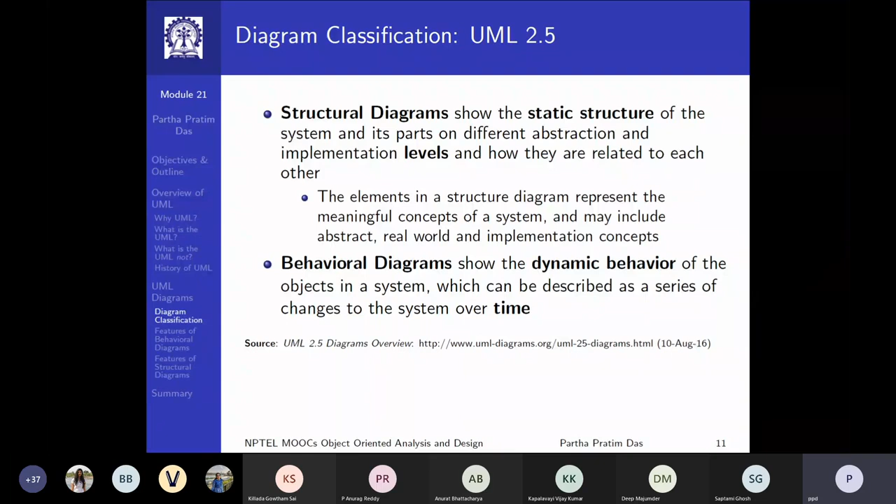And obviously we show the interrelationships. Now, getting deeper, if we look at the right-hand side, the behavioral diagram, then the first and foremost important is the use case diagram, which represents the requirements of a system, including internal and external influences. So this diagram is used to capture the user specification for a system to be built.

Very simple concept of use case is how would you want to use a particular system, right? It's like making a wish, dreaming about the system. If you take the whole system as a black box, then who are the people who will interact with this system? What are the kind of inputs they are expected to give? What are the kind of outputs that are expected from the system? And even internally, if there are actors who need to manage the system in some way, what are the things that they will do?

So use case diagrams - as a term, use case is how you use, it's a case of how you use. So if you look at your booking system, one use case is very clear: that you will have to make a booking. Making booking is a clear use case, where you have an external actor who could be the person booking, because now you have online booking, so people book themselves.

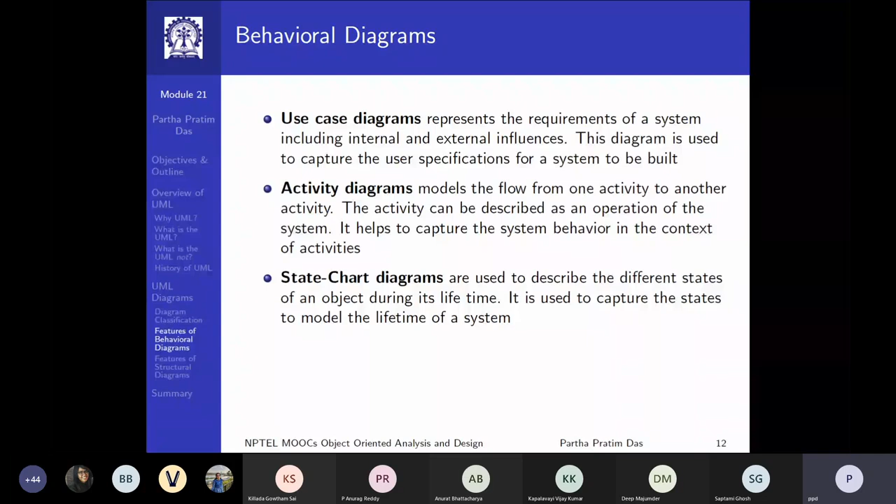We will talk a little more about this later. Some of the other diagrams, like behavioral diagrams, deal with interaction. Most important in that is the sequence diagram, which basically tries to set the ordering of different messages that go in the system.

One key way to look at UML models, or systems in general with strong object orientation, is to think in terms of a client-server model. Every object is one who can accept a message as a request for service. We know objects have states and objects have behavior - behavior is the interface. So when you call an interface, you can think of this as sending a message to that object, and based on that message, the object will react and give you a response.

These are the events that happen in a client-server system. You can think about the whole design as if a pool of objects are floating around in the system at any point of time, with different objects sending request messages to other objects, and they respond through messages again, and based on that you send out more messages. This messaging system in the client-server structure is what the sequence diagram tries to capture - what is the first message that has to happen, who will get that message, and what is the expected output based on that.

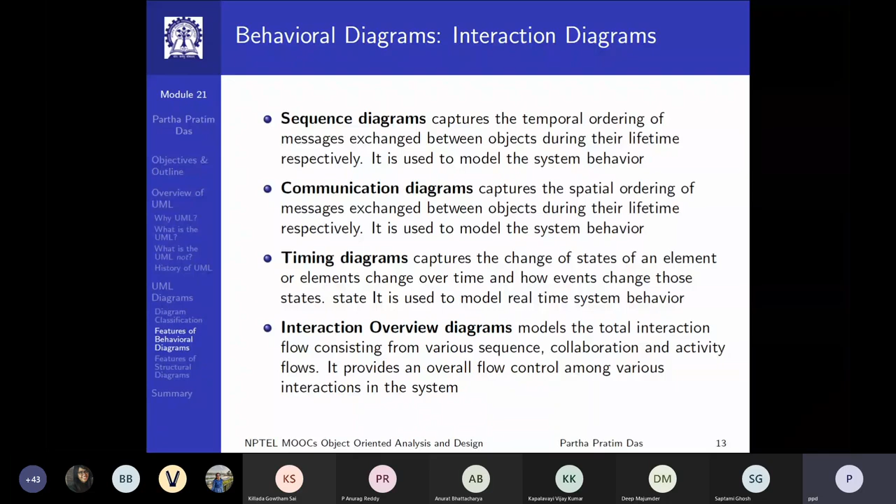So we have talked broadly about these 7 behavioral diagrams. If I go back to slide 10, we have covered use case, activity, state machine or state chart, and these interaction diagrams—broadly these 7—of which we will focus in more detail on use case, activity, state machine, sequence, and communication primarily.

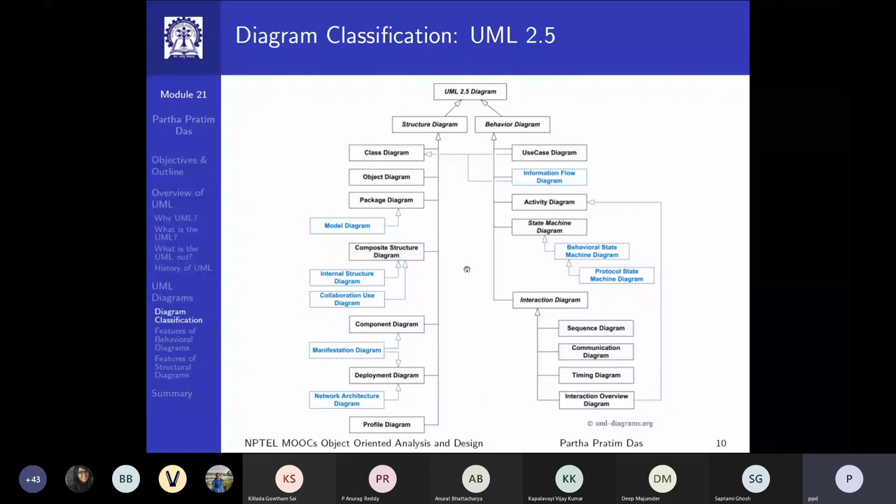Now let's shift our focus somewhat to the structural diagrams. I'm on slide number 14, module 21. The most important structural diagram, which you already know except for the UML syntax and semantics of expressing it, models the analysis and design of the static view of an application. What the class diagram tries to do is capture the key abstractions of the system at the first level.

When we take up assignment 3, we see that there are classes already identified—those are the key abstractions. For example, station is a key abstraction, railway is a key abstraction, booking class is a key abstraction, booking itself is a key abstraction, passenger is a key abstraction. These are the key concepts in the system, and at the first level you make a class diagram involving each of these concepts, represented by a class or by its specialization.

It's pretty much the way we write the code, but written in a language-independent manner. The second part to keep in mind is that it is later refined with details of every abstraction. So you say booking class is my key abstraction, and then it has to be refined in terms of having a variety of booking classes—there could be a first class, there could be AC3 tier, AC2 tier, and so on and so forth. So how will that refinement work in terms of the abstraction?

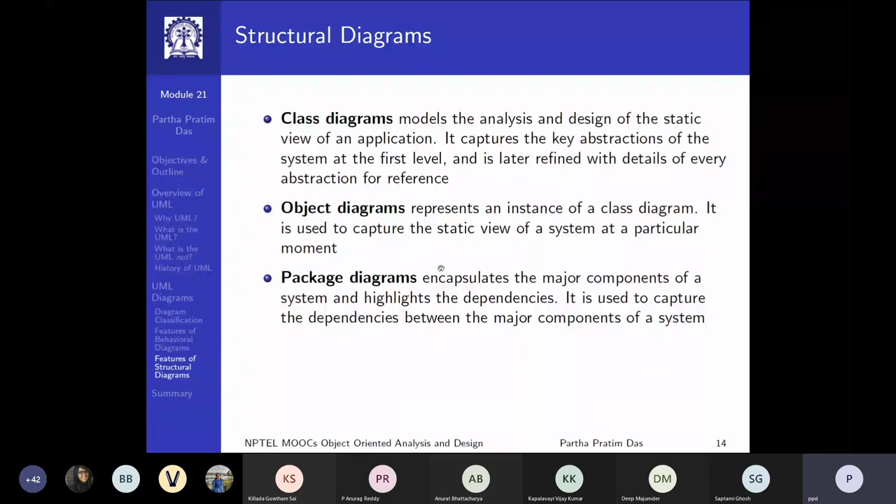So these are the structural diagram views that you have. Then you have a set of structural diagrams for composite structure, part, subpart, and interfaces. You have component diagrams, which is relevant if you have the physical system, and how to implement it in terms of the physical system, so that it can go down to the level of servers, active components, IoTs. Many of the systems today have a variety of IoT, Internet of Things. You can have IIoT, Industrial Internet of Things, you can have MIoT, Mobile Internet of Things, and so on.

So these are physical components, the physical aspects of the system where you need to put your different packages. You can have a component diagram, which is more important for the implementation side.

You have the deployment diagram, which describes the hardware components and software components and how they are deployed. How many physical servers you will have, which software component will run on which server. A particular server may run multiple software components. One particular software component may be huge enough, or may require a turnaround which is very steep, so that it might run on multiple servers in parallel, and so on. So it is used to capture the hardware topology and architecture of the system.

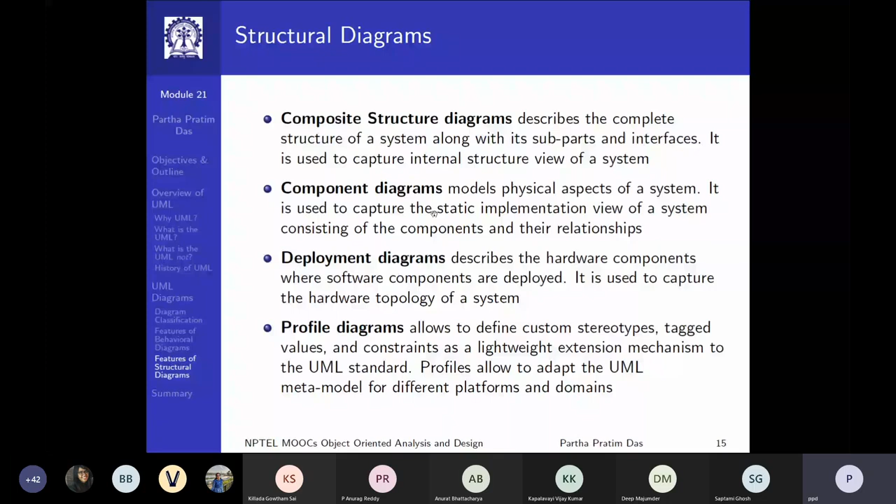Then you have the profile diagram, which is defined to specify custom stereotypes, tagged values, and constraints. These are certain ways to really describe a meta model of your platform, and so on. As you can see, this later part of structural diagrams is going more towards the implementation side. We will not get into the details of that because we will not have that much time, but it's good to know what exists where.

Okay, so having said that, let me move on to the next module, SDLC. What I want to talk about now is, on one side we have the SDLC, Software Development Lifecycle Processes, and we are talking about a variety of diagrams. So what we want to characterize is: given a phase of SDLC, what are the diagrams that are relevant? Or the other question: given a diagram, what are the phases that it impacts?

Now, naturally, we have discussed a variety of SDLC phases, but I have just taken the simple linear, waterfall kind of model to explain here, because if you look deeply, whether you are doing waterfall, iterative incremental, spiral, or agile, whatever you are doing, these are the tasks that you have to do. The order, or rather the extent to which you do them, differs from one SDLC model to another, but these are the tasks.

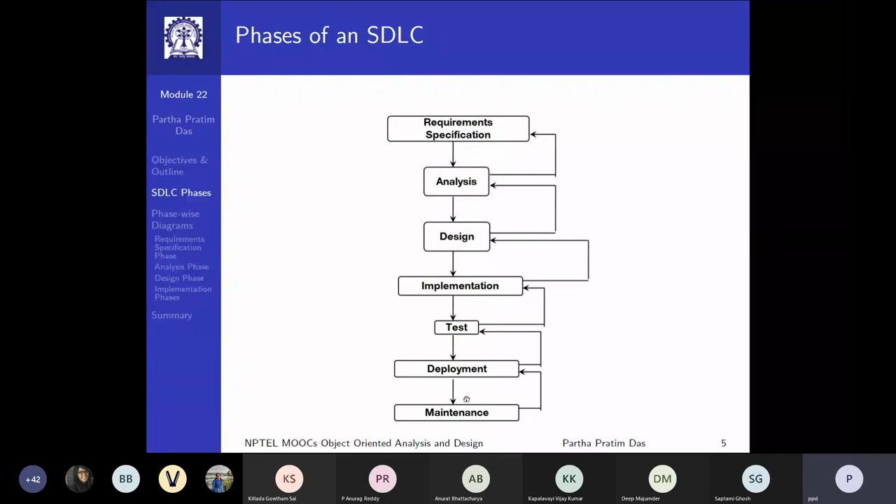So given this view of SDLC, if we look at what kind of role object-oriented system and design play, we will see that primarily, the object-oriented style impacts the first three stages: requirement specification, analysis, and design. That's where you bring it to a well-designed object system. And then you get into system implementation using OOP, because once your design is complete, you have an object-oriented system.

Now you have to make sure that you maintain it. You can make an object-based design and then implement it in a way that breaks all encapsulation, makes everything public, flattens it out, and so on. So you have to maintain that through implementation. The test itself has to be object oriented -- we have talked about, say, unit tests for that matter -- which clubs directly with the objects or classes that we have talked of. So these are the typical views that you'll have.

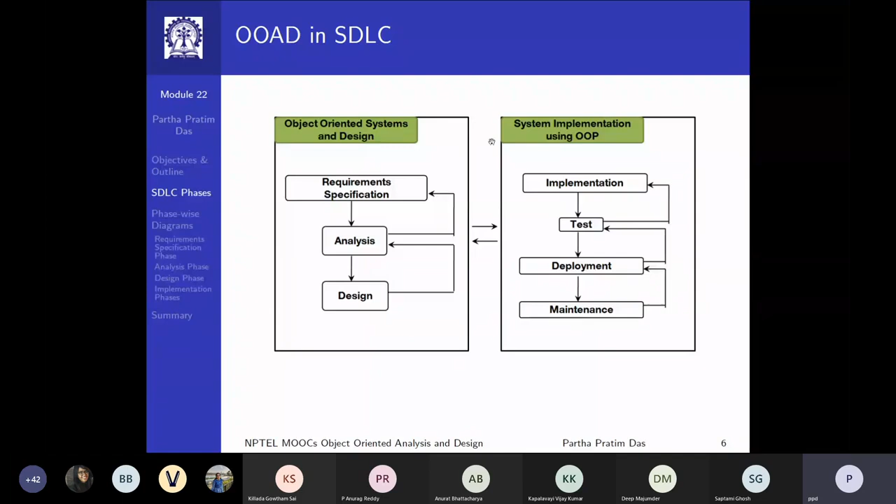Now, starting with the requirements phase, we'll primarily talk about the initial. Talking about the requirement phase, in the requirement specification phase there are three possible activities, three possible models.

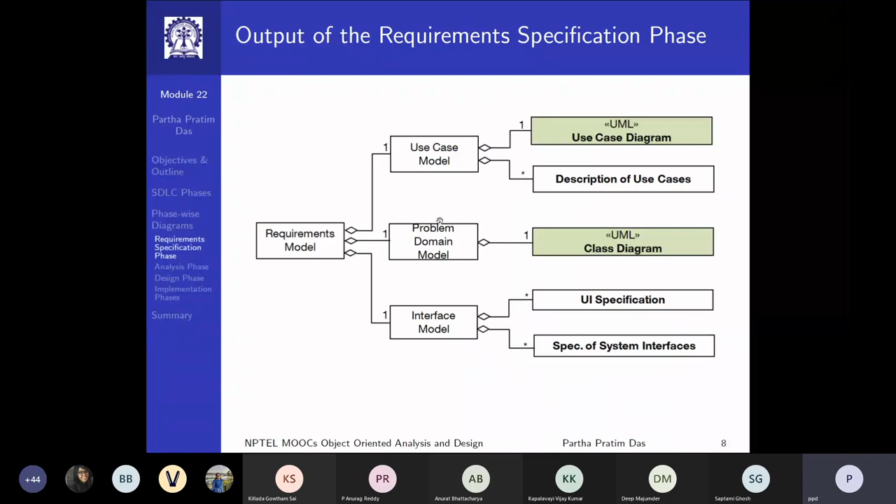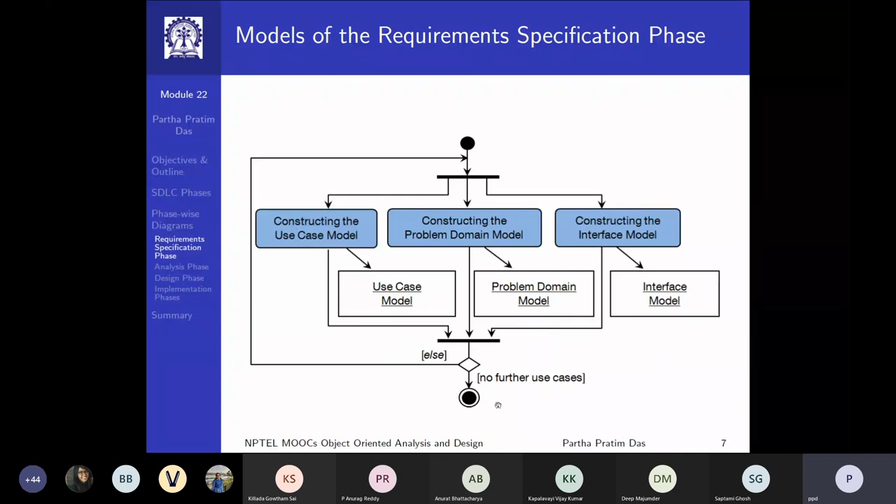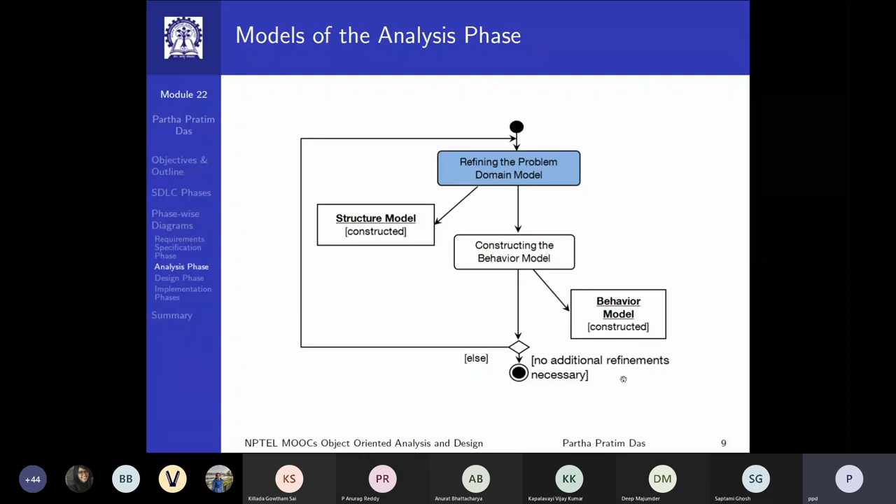So looking in terms of the UML diagram, the analysis phase will have analysis models which consist of a structure model and a behavioral model. Structure model is the class diagram, and behavioral model is zero or more of sequence diagram, collaboration diagram, state chart diagram, activity diagram. You may have all of them.

You may have multiple of some diagram, you may have none of them, and so on. It depends on the requirements, but together this is your analysis model, wherein you'll have all these different UML diagrams giving a complete analysis of the system, validated to your level of analysis given the requirements you had.

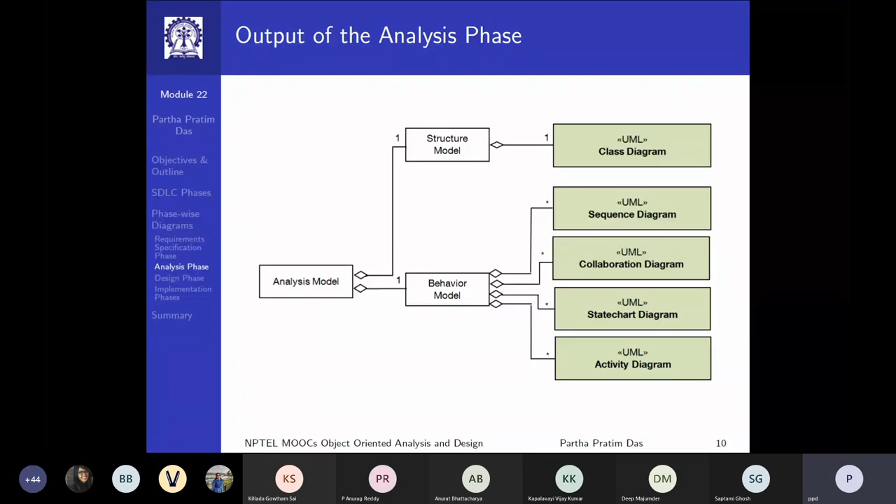And you move on to the design phase, where with this model you start working on the system design, first creating the high level design model, then going into detailed design and creating the low level design model, and iterating over that.

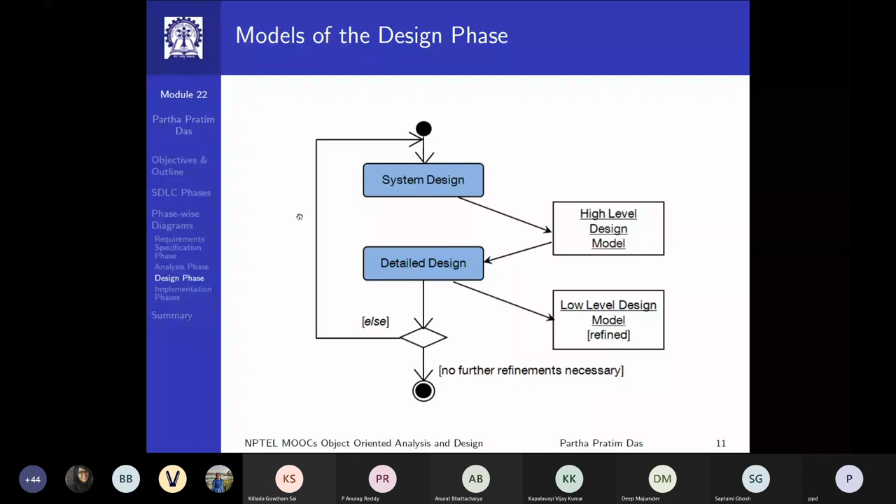So in terms of the design model, you have the structure model, you have the behavioral model. These are already built, and you will have—

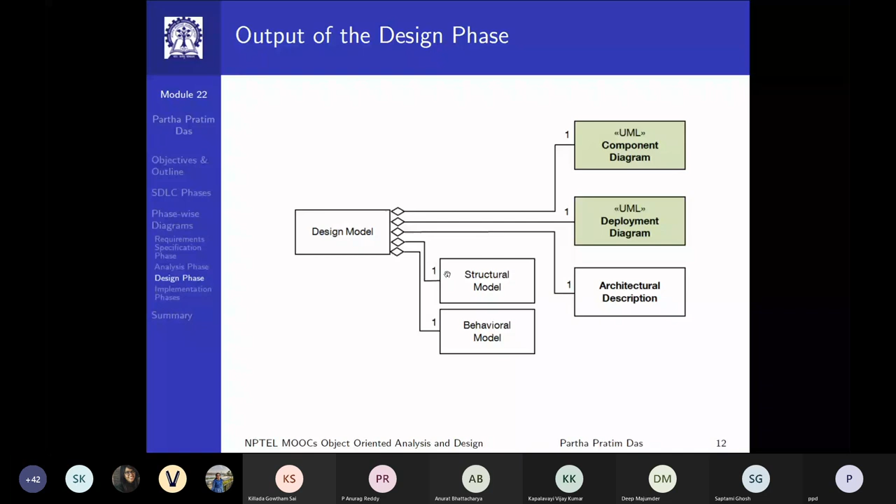So in terms of the design phase, you have design models. You have component diagram and deployment diagram, which come from UML. But typically you also have architectural description, which is still under development in UML, so it is still kind of non-standardized. And you have the other structural and behavioral models that we have already discussed. So that is how your design model works out.

Finally, in the phases of system implementation, like the remaining phases of SDLC, you will implement the models that we have built so far, and some additional diagrams will be used here. We will not go into that much depth—we are just trying to gather a basic understanding of UML.

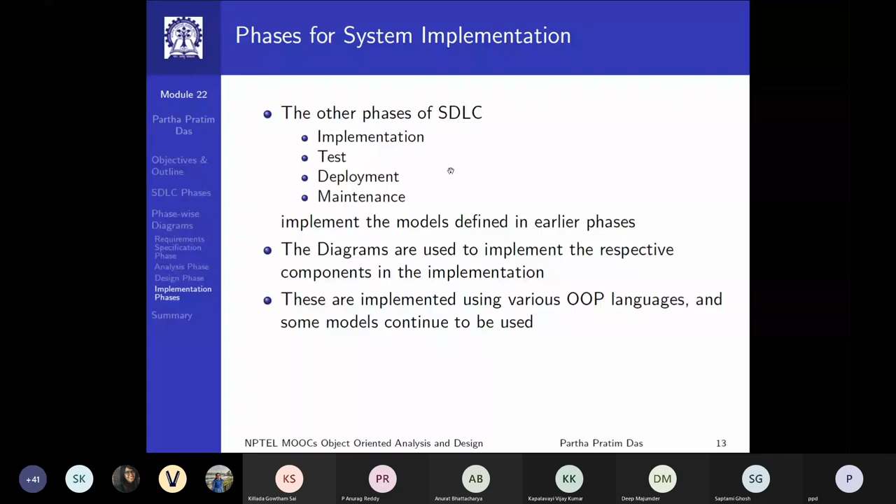So from the next class, we will take this example of the leave management system, part of the booking system—not too much, because I want you to do that exercise on the booking system—and discuss these UML models which we have listed for the requirements phase, the analysis phase, and the design phase.